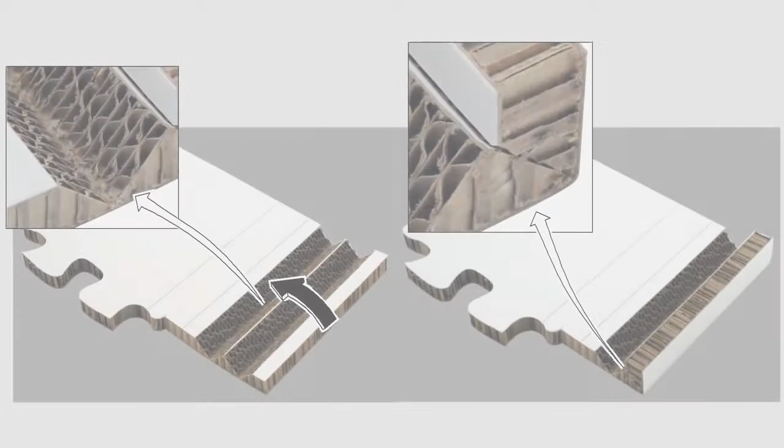The V-Cut tool is the perfect device to produce angle cuts and V-grooves. It provides an efficient method to create structural designs from foam boards and corrugated sandwich boards like X-board and Reboard. Like that, you're ready for a great amount of different applications: clever product stands, brochure holders, sophisticated displays, elaborate packaging, and even furniture for your exhibition booth, and much more.

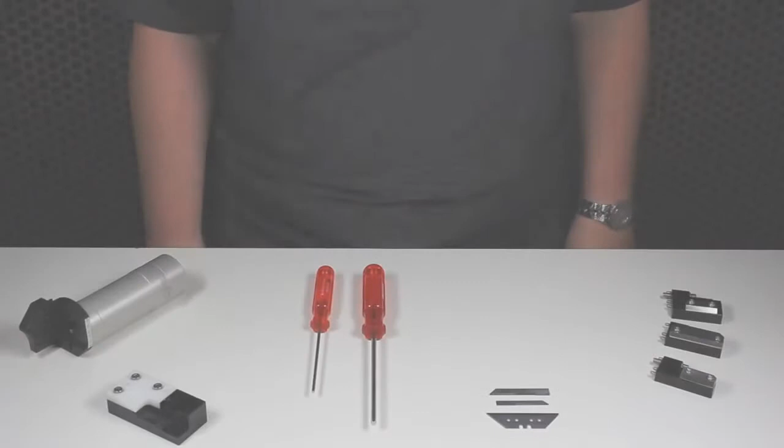The well-thought-out design allows quick tool changes and easy, precise setting of the various cutting angles. The knife is inserted with the aid of an adjustment gauge, which guarantees accurate cutting depth and high reproducibility.

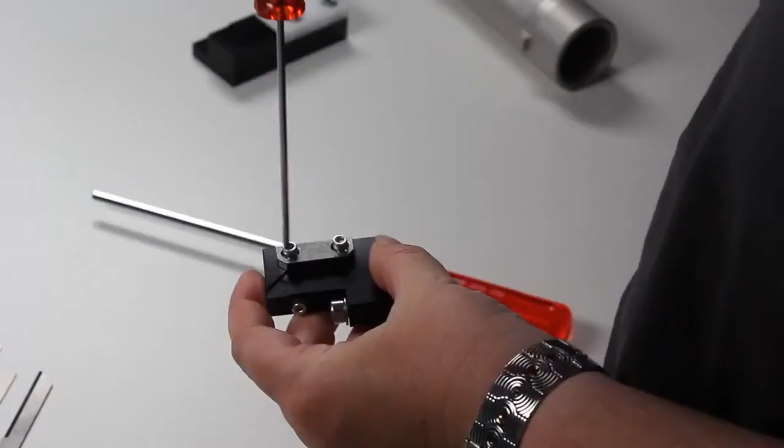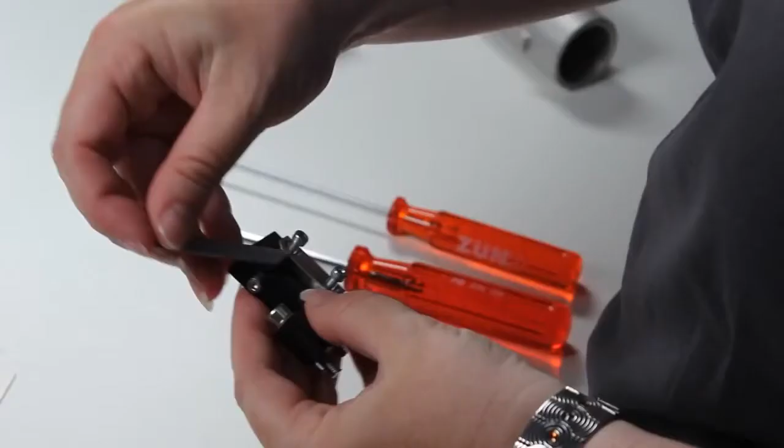First of all, loosen the knife holder clamping with an Allen key. You can now insert the blade, but make sure to combine knives and blade holders correctly. In our example, we are using a knife Z71 with the blade holder for cutting depths up to 10 mm.

Then place the knife holder into the adjusting gauge and fold it down. Screw the knife holder to the adjusting gauge. Like that, you can align the blade absolutely precisely.

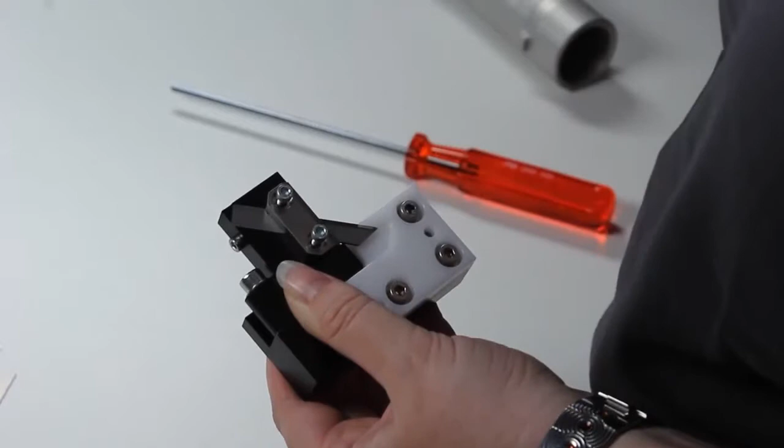When the blade is arranged correctly, tighten the clamping of the knife holder to fix it. Now you can unscrew the knife holder from the adjusting gauge again and fold it upwards to remove it. Like that, the blade is correctly fixed, and you can now adjust the cutting angle.

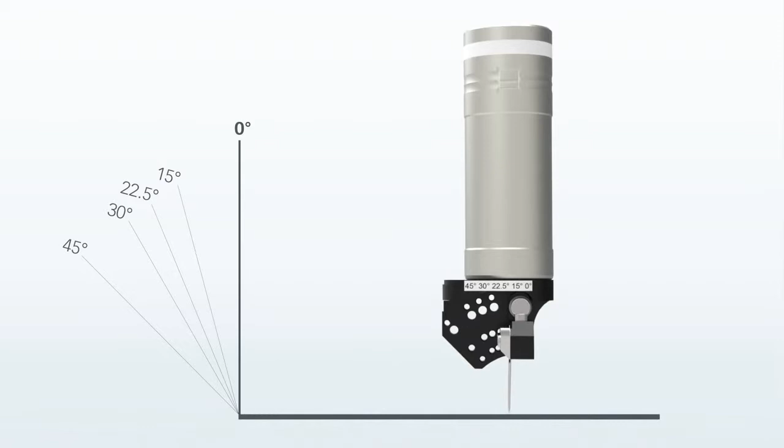The knife holder can be assembled in 5 different positions. The possible angles are 0 degrees, 15 degrees, 22.5 degrees, 30 degrees, and 45 degrees.

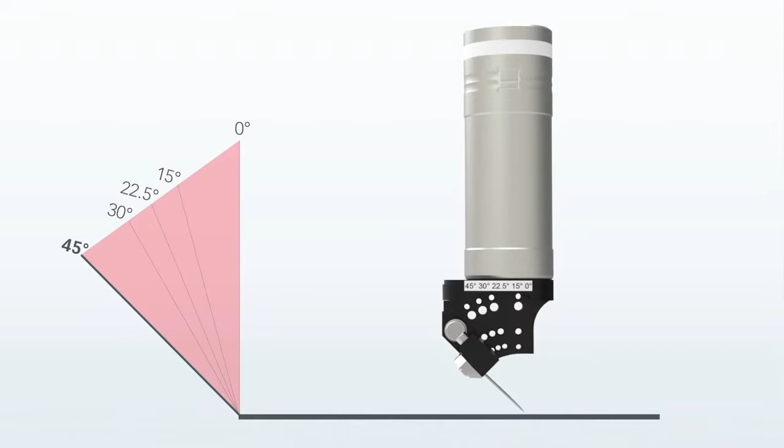In our example, we will set the angle to 45 degrees. The procedure is very easy. Just guide the knife holder into the desired holding fixture on the holder and tighten it with an Allen key.

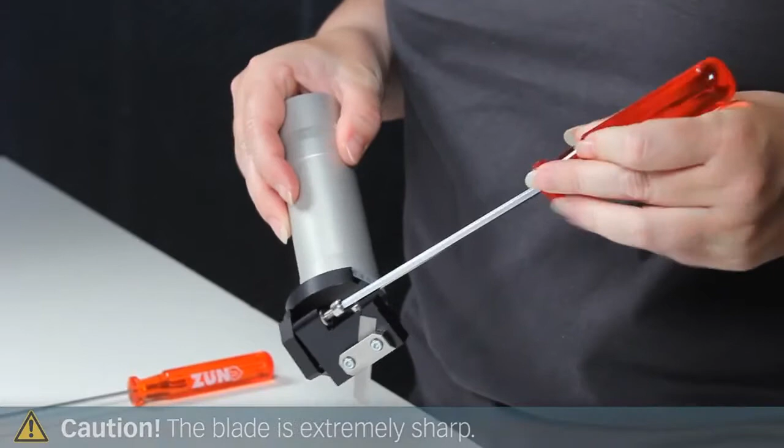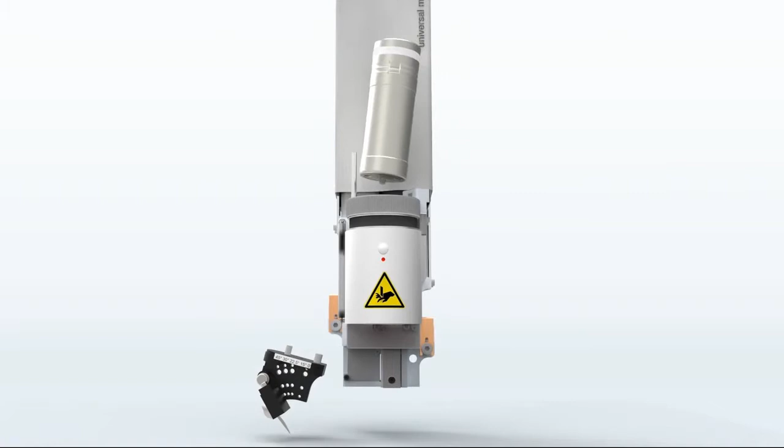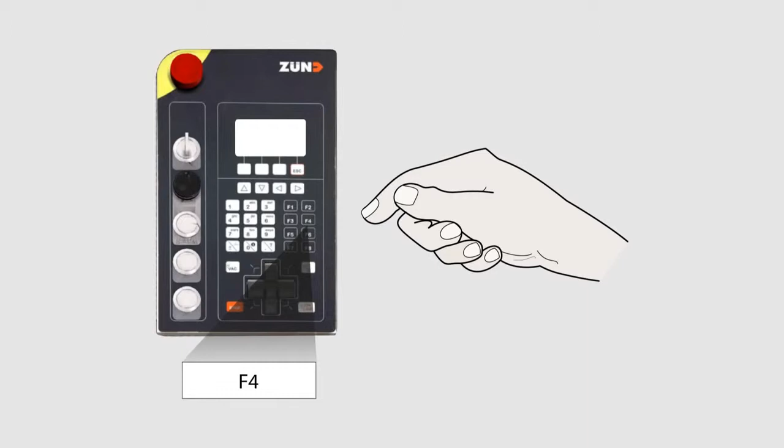In order to insert the VCT into a universal module, you have to put the tool sleeve into the module opening as usual and then mount the knife holder to the sleeve from below. To do so, press F4 in the cutter menu. The module carriage moves to the module change position.

To place the VCT in the tool guide, align the red mark on the tool with the red mark on the module. Lower the sleeve until it stops. Then press the module lock and latch the bayonet catch.

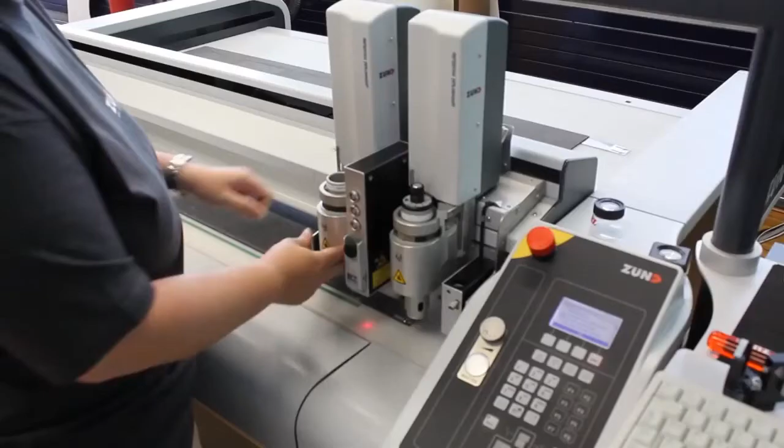Now you have to hold the knife holder with the inserted blade to the sleeve opening from below and screw it. The VCT is now inserted.

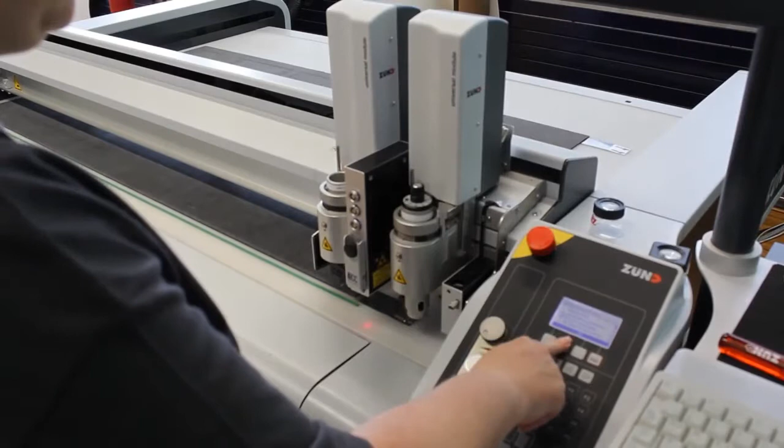Follow the instructions on the cutter operating unit if you want to insert a new VCT or select an already existing VCT.

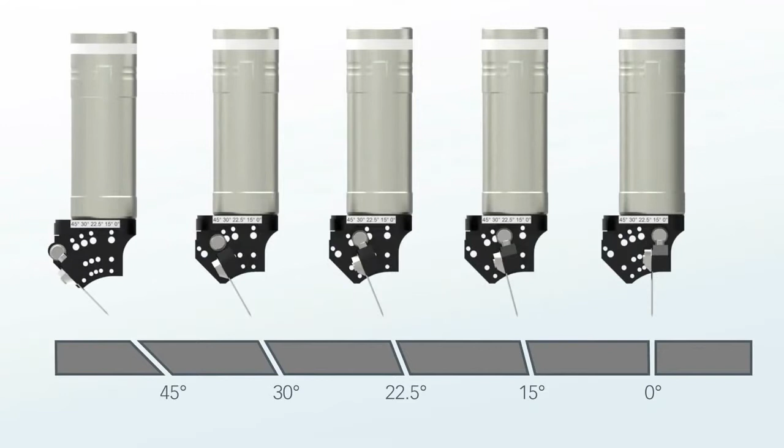The setting of the infeed angle ensures that the blade automatically penetrates into the material at the correct angle. Always make sure that the set infeed angle value matches the value set on the VCT.

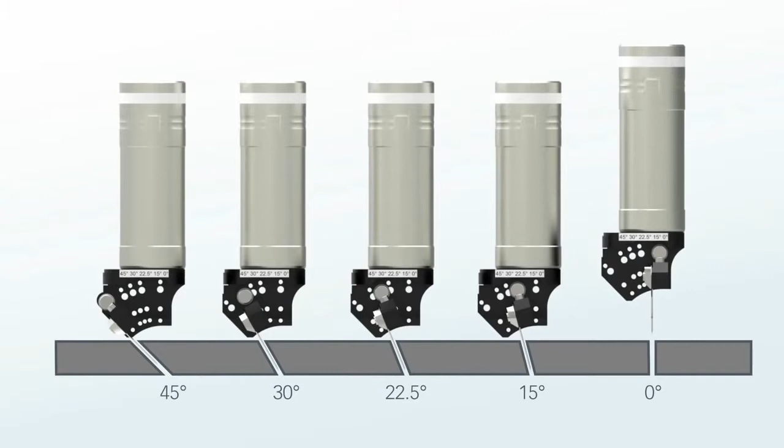Remember, we have set the cutting angle on the tool to 45 degrees. This means that we have to set the infeed angle here to 45 degrees as well. Switch to the infeed angle setting dialog with F1-3-1-1. Select the correct infeed angle and confirm with OK.

The V-Cut tool is fully integrated in the ZCC. The software assists in preparing your jobs and guides you through the whole production process.

What we have here is a foldable octagonal box that we're going to process using the V-Cut tool and the universal cutting tool. As we need to cut V-grooves of 45 and 22.5 degrees, I'll change the cutting angle during the production. If you have a second V-Cut tool and a third universal module, you can of course mount both tools next to each other and process the job without interruption.

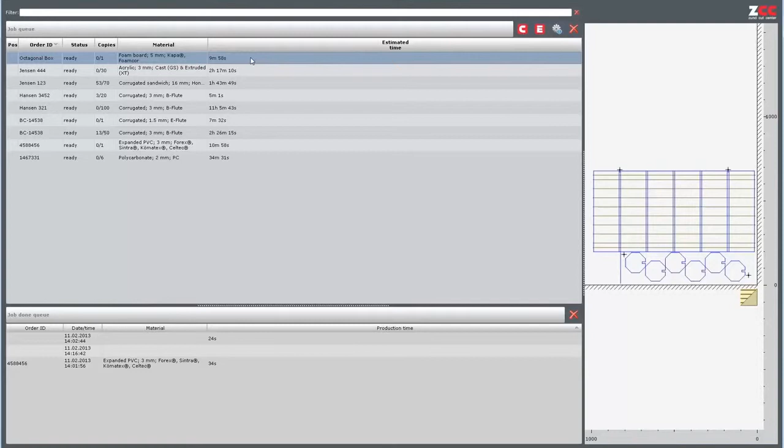The result will be the same. Let's have a look at our production steps. The first thing we need to do is the registration.

As the material in our example will be processed with the printed side facing downwards, we also need to register the material borders and then turn the material. After another step of registering the material borders on the back side, the actual production starts with 2 V-cut passes. The first pass will be the one with 45 degrees and the next with 22.5 degrees.

With a double click, you can open the machining step settings. Make sure that the correct values are set or change them here if needed.

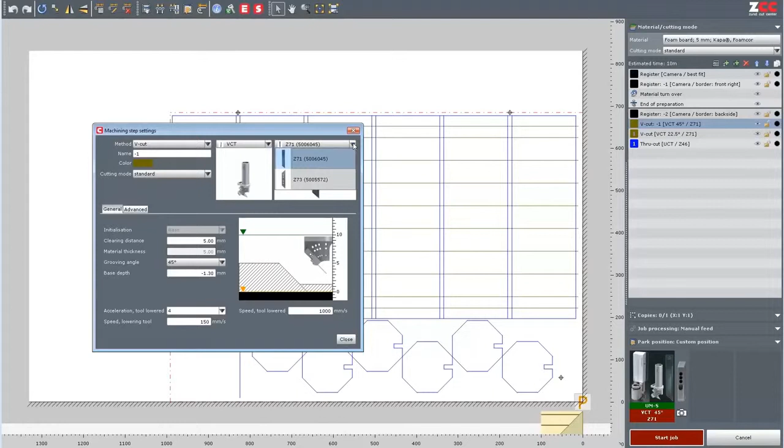In the last production step, we produce a regular through cut using the UCT. Make sure that all settings are okay and that your tools are initialized. When you're ready, you can start the job.

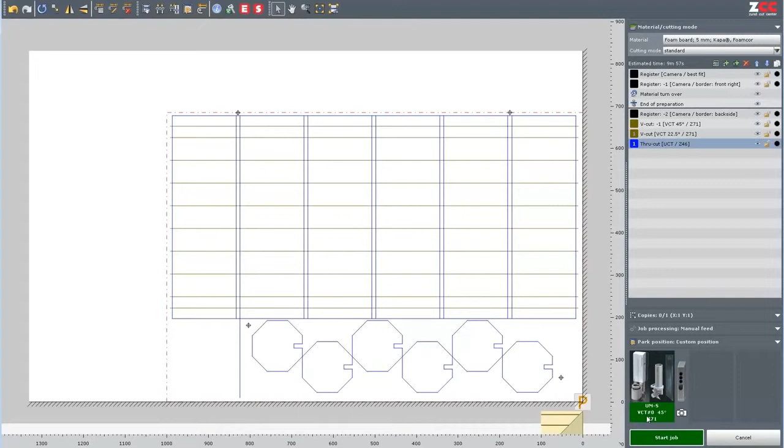The cutter will now work off one step after another. First of all, capture the register marks. Now register the material borders and turn the material over.

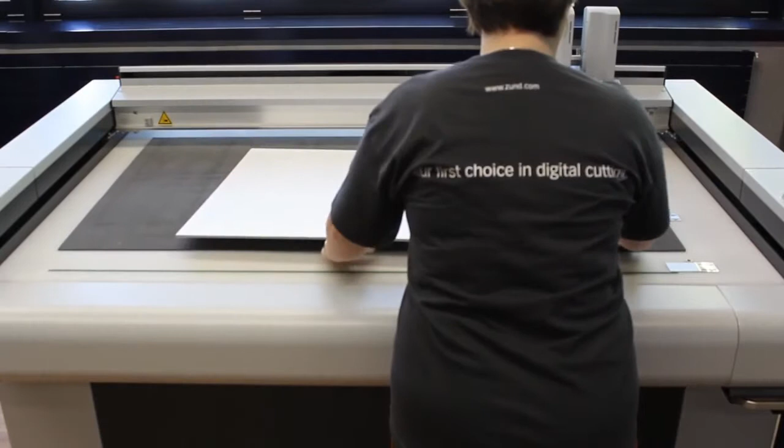Then register the material borders on the back side and see how the first V-cut pass with 45 degrees is done.

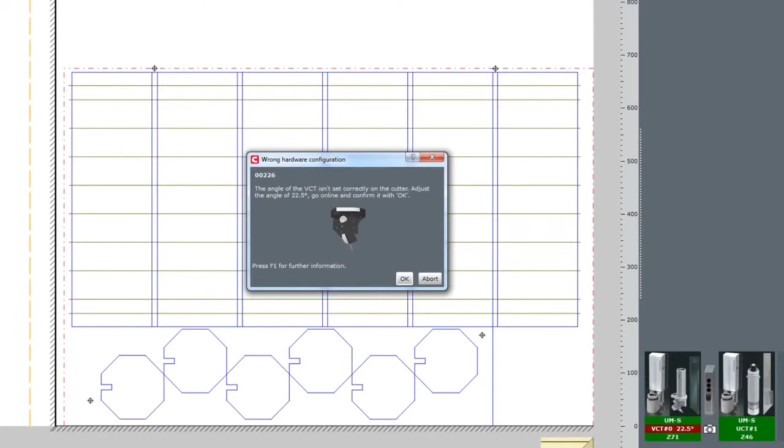After this production step, the ZCC will prompt you to change the cutting angle. Unscrew the knife holder and set the cutting angle to 22.5 degrees.

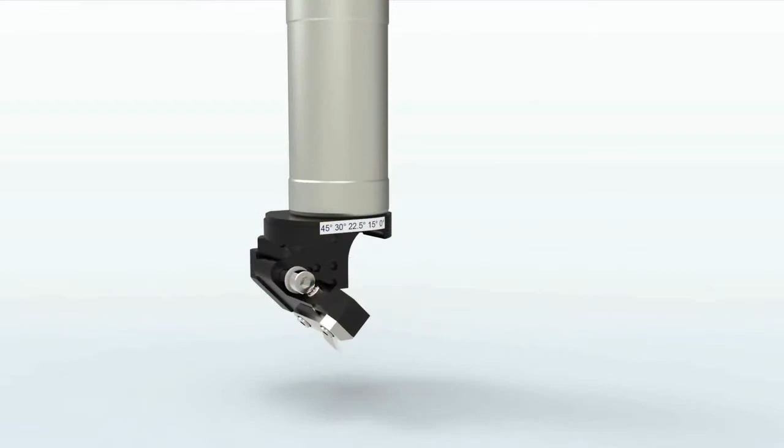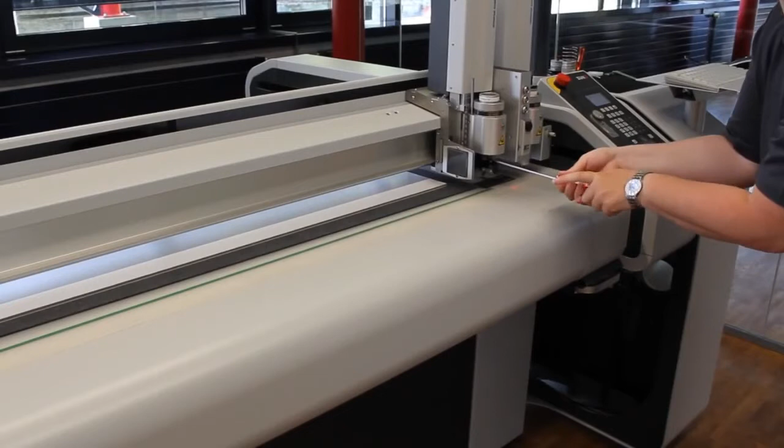Now follow the instructions on the screen to carry on with the rest of the production.

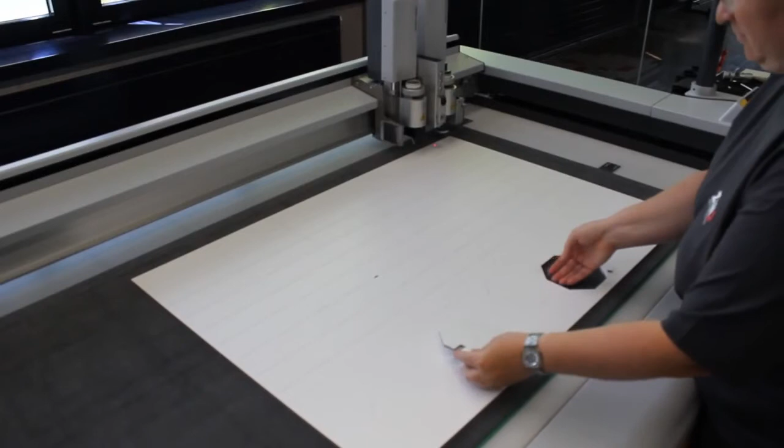You see, with the versatile V-Cut tool, you're able to cut 5 different angles with just one tool. The perfect integration to the ZCC, as well as the quick and easy tool changes, add up to the superior user experience.